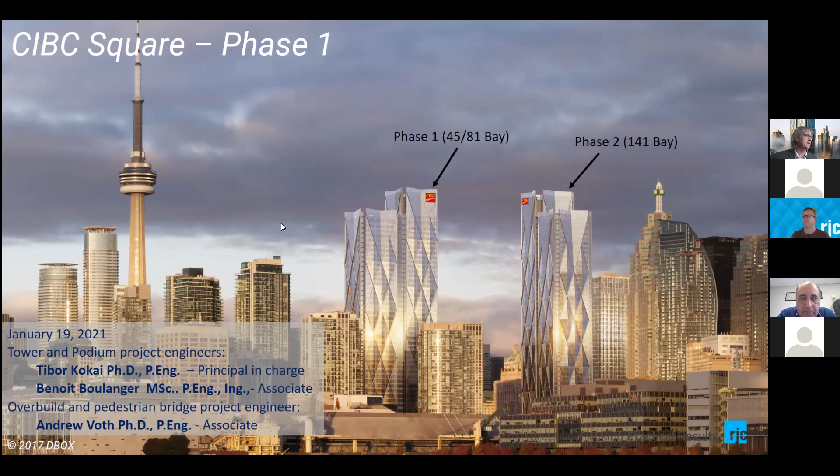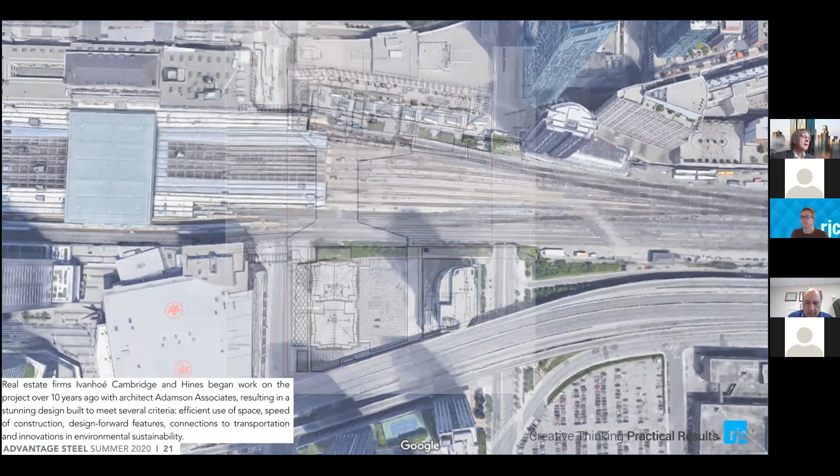The complexities are enormous because there's a TTC LRT tunnel from Queens Quay. The streetcar goes underground, turns up, and turns here. The Gardiner Expressway with its special foundations is also an issue. The current GO bus station at the top of the screen is right now operating from the Phase 1 podium.

That's an interesting proposition, because the North Tower, Phase 2, the brown part, has its core fitting at the current GO bus station, or the previous GO bus station location. But the columns cannot come down because they would be in the rail corridor. That's an incredible complexity we'll talk about. This project is at least 10 years old.

Ivanhoe Cambridge bought the land. Adamson Architects started, Adamson Associates Architects helped them putting the proposal together, and the whole scheme did an incredible job.

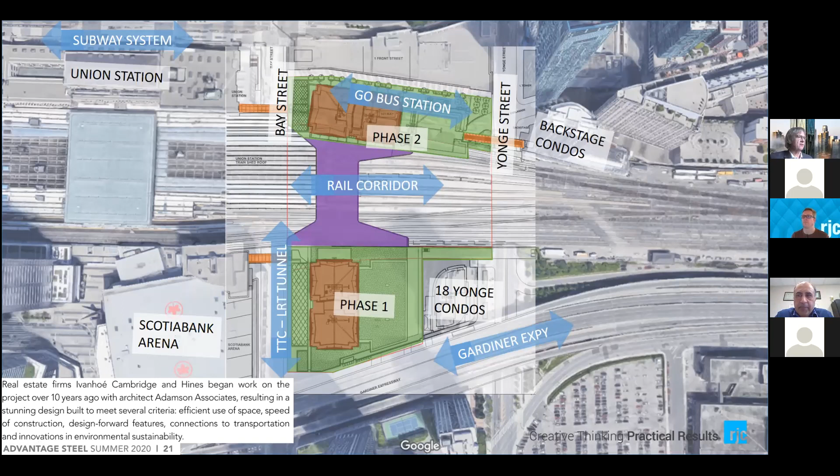And of course, the competition was won by Wilkinson Eyre, who are the design architects.

So the two towers model is here, 2.9 million square feet. CIBC leased 1.75 million. Developers are, as I said, Ivanhoe Cambridge, architects Wilkinson Eyre from London, England, Adamson Architects. Structural is RJC, electrical Mulvey & Banani, mechanical TMP, general contractor EllisDon, structural steel Walters, formwork Structform, rebar Harris.

We'll talk about these more, but it was an incredible team. I have to tell you, for many, many years, we worked together. There were tough times. Everybody behaved in a civilized manner. We are still happy when we see each other. And I tell you, with the complexity at this level, it's a great result.

So let's talk phase one, the tower. The tower is 49 floors, 6 mechanical penthouses, 3 underground parkings, 1.5 million square feet rentable, 54 elevators.

Think about it, 8 levels of podium. The podium houses a real bus station, 2-level bus stations, plant rooms, mechanical rooms, food hall, fitness center, conference center. There's a pedestrian bridge on the project, etc.

And future connection to the LRT, TTC LRT, I showed it to you. And of course, with bridge to the Scotiabank Arena, former ACC.

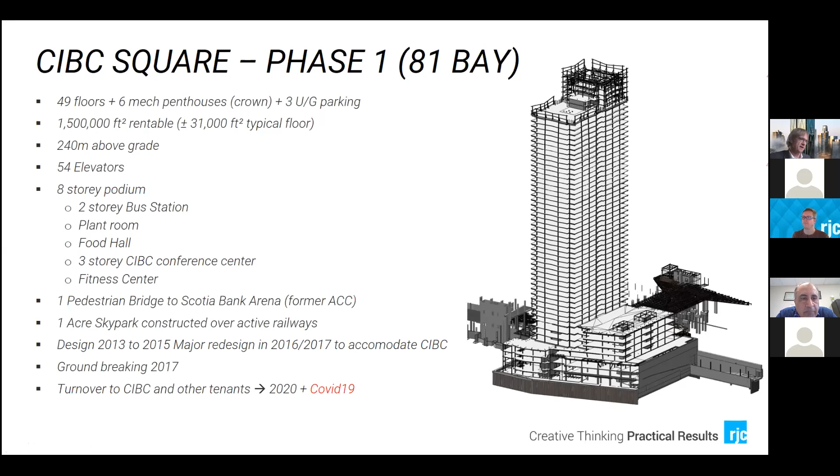Some tonnages and some data about the project: 130,000 cubic meters excavated. I'm watching my clock as well. 12,000 tons of rebar, 2.2 million square feet of formwork, 86,000 cubic meters of poured concrete, 15,360 tons of structural steel.

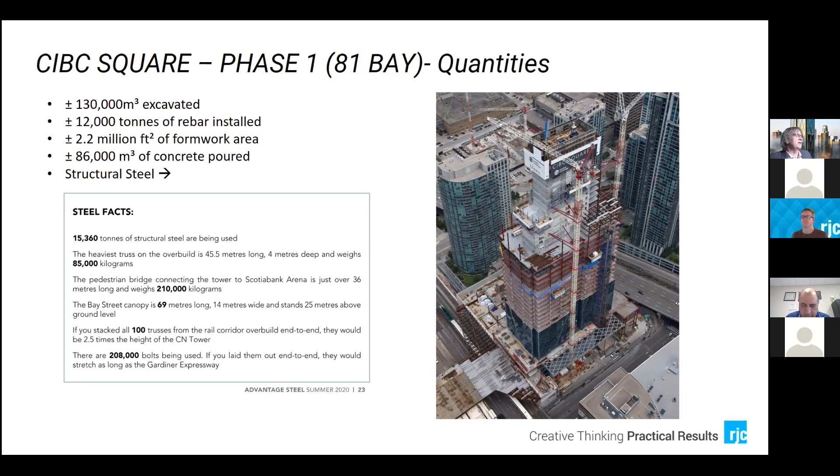Think about it, heaviest truss is 45 meters long, etc. I think that we'll talk, I'll not read everything here, but some canopy is 69 meters long, and Andrew will talk more about the structural steel when he does the overbuild, the podium.

Walters published a little paper about this project in Advantage Steel and talked about and quoted John Frank, the owner's representative. He works for Hines, and he thinks that this is the most technologically advanced project for Hines in the last 35 years, and probably this is certainly the most complex in Canada and maybe in North America.

And he also commented, a senior VP, John Frank, a very great personality, a great person by the way, by training an architect. He said that structural steel was the only choice, and it was faster building in structural steel than concrete. We'll talk about that later. And of course, the rail corridor, another great statement by John that it had to be structural steel. And I guess Andrew will talk about it much more.

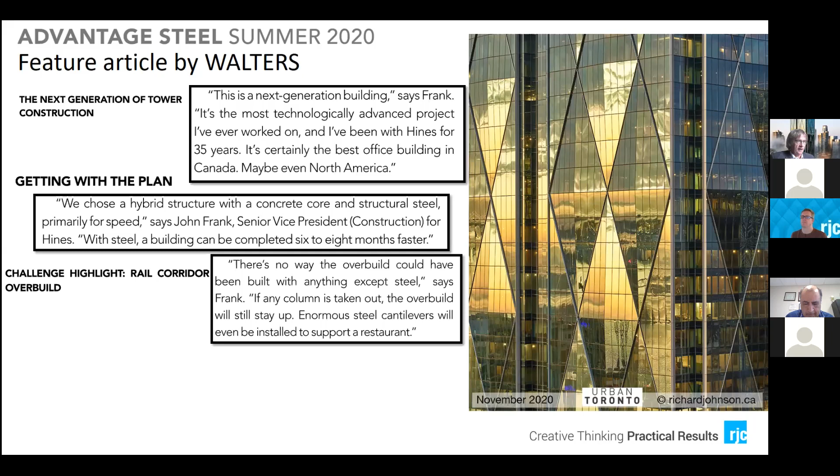So let's talk about the podium. Now we go, that was the introduction about the project. Let's talk about the podium, how complex the podium is.

And you see on the right where my cursor is, that entrance for the bus terminal works now. You can use this. So the podium has Metrolinx's new Union Station bus terminal in there. So Metrolinx did pay part of it for what is there. So yes, it was Hines, Ivanhoe Cambridge, but Metrolinx was a partner. So there was a great cooperation with Metrolinx in making this happen.

And I maybe missed them, but they were really another great group of engineers there. There is a mechanical plant, food hall, and three floors of office building. So look at the complexity.

So the tower is on the left side, and to the very bottom left on the screen, you see the overbuild where the trains are. I mean, magnifying this, you see that at the ground floor level, there is a bus. Now, that's the first level of bus terminal.

But now the green is a 24-meter span post-tensioned slab, flat plate. It couldn't have been thicker because otherwise this elevation would get too high and it couldn't match the overbuild over the rail land. So there were architectural and geometrical constraints on why we selected what we did.

It's not just the engineer saying, oh, I'll do a PT. This is concrete built below grade, then a PT, then structural steel, and everything from here is structural steel. So this large span PT for the buses, full story truss for buses, and between the trusses and mechanical systems, and above offices - very complex. And organizing all this, designing, building on time, super complex.

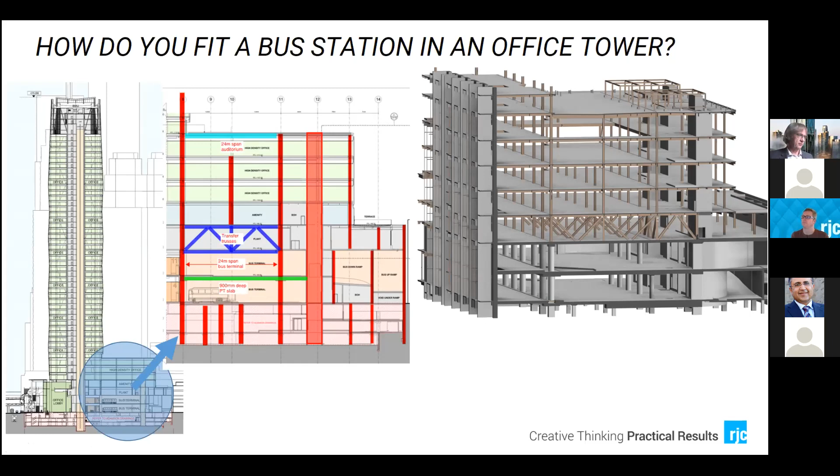You will see the details now. So this is the podium, Revit. You're building the columns, then you are building the ramps up and down.

So here you see it's like a DNA, like a scissors there, by one coming up and going down. And this is the post-tensioned slab. Now we are starting with the trusses. But think about it, when you build these trusses and you deck it, you can't put in the big mechanical units. So the big mechanical units were put in before the floor was poured. So the top chords of these trusses were unsupported. Is that right? So you had to temporarily shore them so they don't buckle and you can still install the mechanical units. There's lots of thought going into this in how you design it.

And what is interesting, and very important for you young engineers, is that sometimes the support conditions of the structural elements during construction are more complex and very different from the final condition. And you have to design for those steps. And that's not as easy because you have to understand what the mechanical engineer is doing and installing the units now and not later, etc. So this is where the teamwork of the consultants is so important. It's not enough to know running ETABS and SAFE. I love those, don't misunderstand. I love 3D finite analysis and whatnot, but you must understand why you do what.

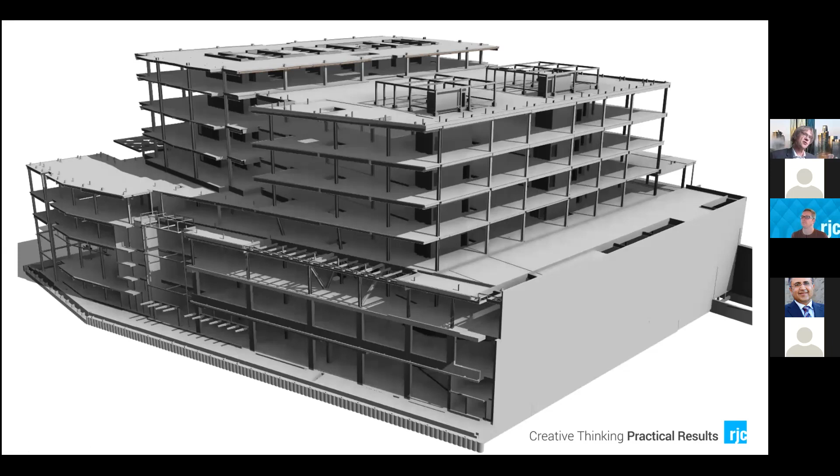Anyway, it was a bit long. Here's the mechanical coordination. These are just the ducts. And so then you build up, up, up. This is now our normal, typical structural steel floors. But as you see now, we leave out the columns and there's the big auditorium here in the top and so on and so forth. So that's the podium. And of course, we didn't even talk about the basement. The basement is 3-level underground reinforced concrete, but the loading dock is there. So all these have to straddle the loading dock. But this is the reality here. This is the real picture as you build it.

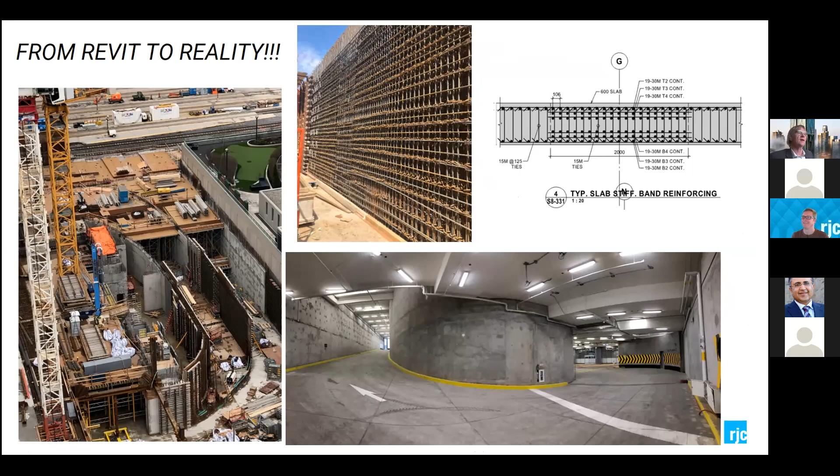And it's beautiful. And what you see here, this wall with this insane amount of shear elements, I cannot tell you why it is there, but it's a special design consideration for this building. And that's all I can say. I think you might understand, but if not, well, sorry, I can't tell more. Some things are confidential.

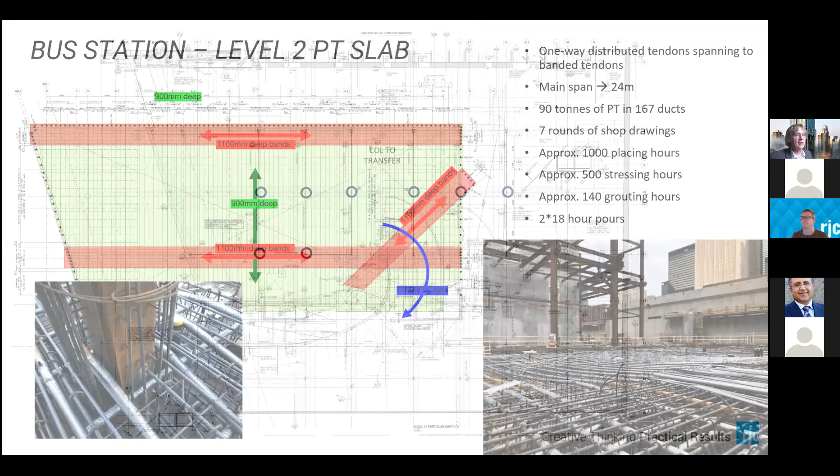So this is the PT, level 2 PT. We have 900 PT slab. We have a band of 1100. And this is 90 tons of PT. This is 7 rounds of shop drawings coordination. It was two pours, each 18 hours. And look at the PT, the ducts. You see the two-directional post-tensioning ducts, and around the steel columns, which were sitting on concrete below. So it's picked up by a concrete column below. These are the columns above, columns to transfer out, and those are the orange ones which go down. And you will see that the steel trusses were located to pick up these columns from above.

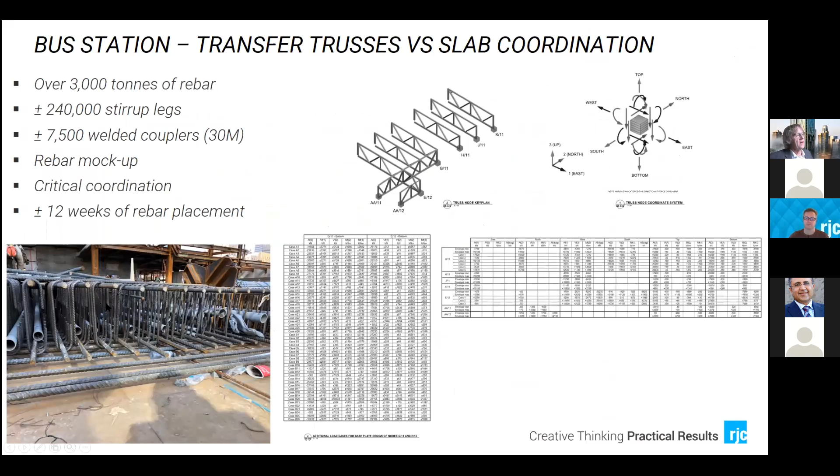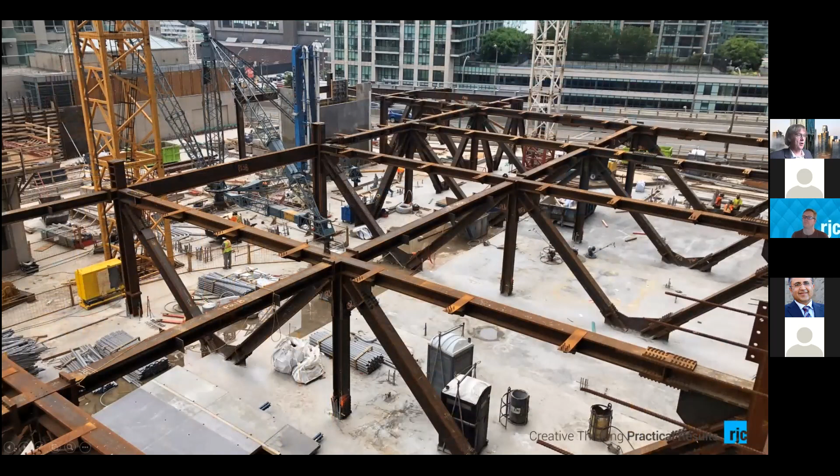And this is the 3D trusses you saw. And what you see at the bottom left is the slab in line with the bottom chord, and we had to have continuity. So this is how it looks. So this is the bottom chord of the truss, but the slab is a touch thicker than these bottom chords. And we had to have bar continuity. So these are half-length couplers welded to the nodes, and we had the continuity ensured that way. And this is then a concrete pour. And the mechanical units here are not in yet, but so that's the podium.

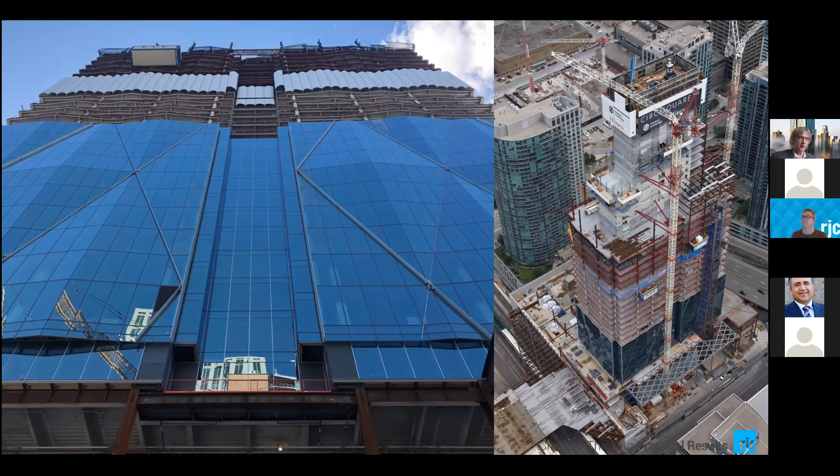So let's talk about the tower. The tower is another complex piece of architecture. It's a beautiful architecture. And I will tell you again, because it's true. If it wasn't true, I wouldn't mention it. So Wilkinson Eyre and Adamson were a charm to work with, and the whole team was great. And the owners were making decisions on time, which is super important. You can have a great crew of architects. If the owner doesn't make the decisions on time, everything is slipping. But there was a great schedule worked out by the client and the architects, and we adhered to that schedule. And there were bi-weekly all-day meetings, and the architects flew in from London, England. It was that serious. Sometimes they called from London, but it's not the same, as you know. So office, 49 stories, 240 meters tall.

Again, don't forget, this is exposed to wind because in the rail corridor, the wind is coming from the west. So the shielding of the building is not there. A building at King and University, for example, is much more shielded than here. So of course, it was wind tunnel tested.

So this picture on the left of your screen is the original design. Not much different, but look, this is a real diagrid. The columns were diagonal coming down. And this is where the rail goes, and this doesn't go down because this is where track number 1 is in Toronto. And I think Union Station has about 50 million people a year coming. You can't stop it. Then there was a shopping mall over the overbuild, which never happened. But this is the overbuild, over the track. And this is phase 1 we have.

But what happened is this, and it's very much the same. So congrats to the architects and the owner that they kept it. The difference is we don't have a diagrid, and that has a very short story. And the short story is very simple. We designed the diagrid. It's way too expensive. The Toronto market per square foot of office is not New York, it's not London, England, and it's not Tokyo. So if you only rent for so much per square foot, you can only build for so much per square foot. So that's your market. When in Rome, do as the Romans do, and when in Toronto, you can only build what you can sell in Toronto. So it's very important that we understand these parameters.

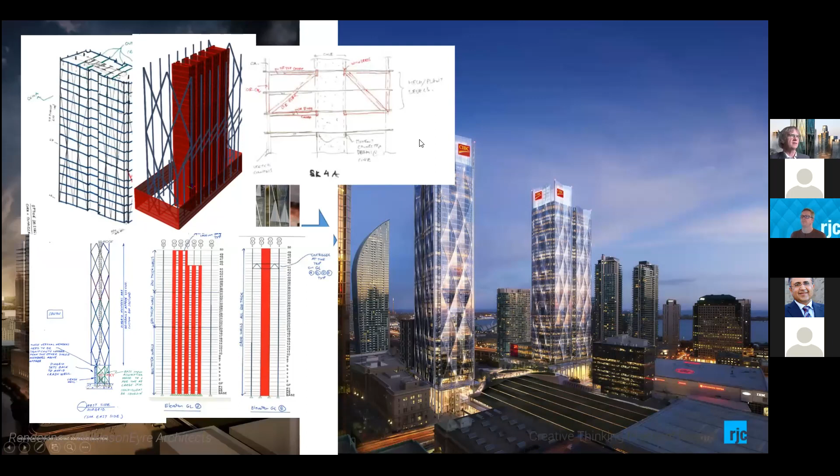This is some model, but we have done many ETABS runs on many different schemes with outrigger schemes. Look at the outriggers at the top. Yeah, it's hand sketches, but I want to show you that we start there. We start to imagine these structures in our mind, then we build the ETABS model, then we see if it works deflection-wise, acceleration-wise, and strength-wise. Never miss any of these. One doesn't go alone. So this is the outrigger scheme.

This is now the current scheme of phase 2, columns coming down, tilting in to avoid getting into the rail corridor. And various schemes we have done: concrete typical floor, structural steel typical floor, concrete, many beams with concrete. So all kinds of options, and we costed it out to see what's the most efficient and cost efficient.

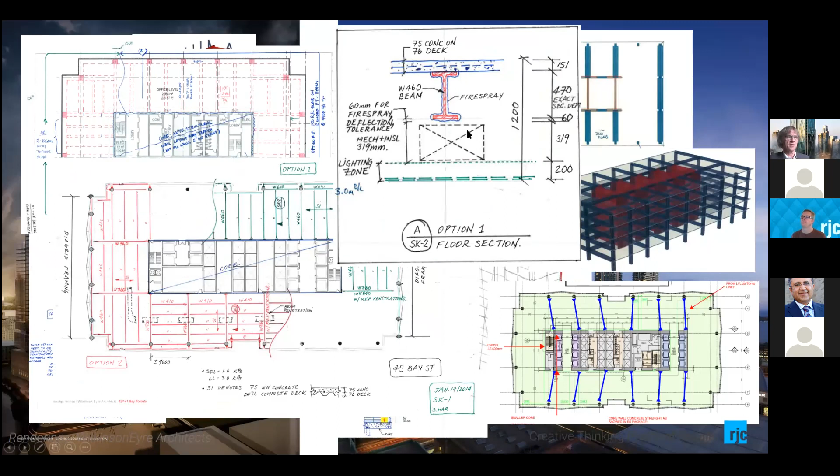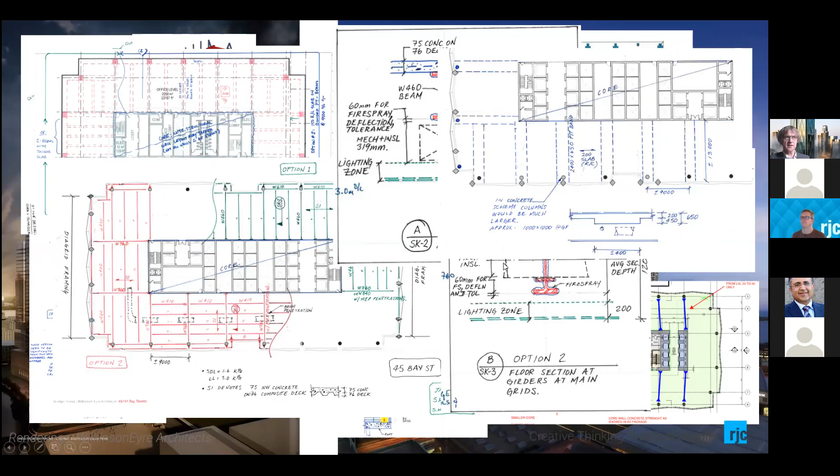And this is a classic. Day 1, you want to know what's your slab, your deck on the steel beams, mechanical goes under it, electrical light fixtures are here. What is the sandwich? Can we build this height of tower? And the same with the girders: when the ducts go through the girders, does this work? Day one, you have to. Here's a post-tension scheme. Post-tension flat bands, ducts below. So what is less costly? What is faster to build?

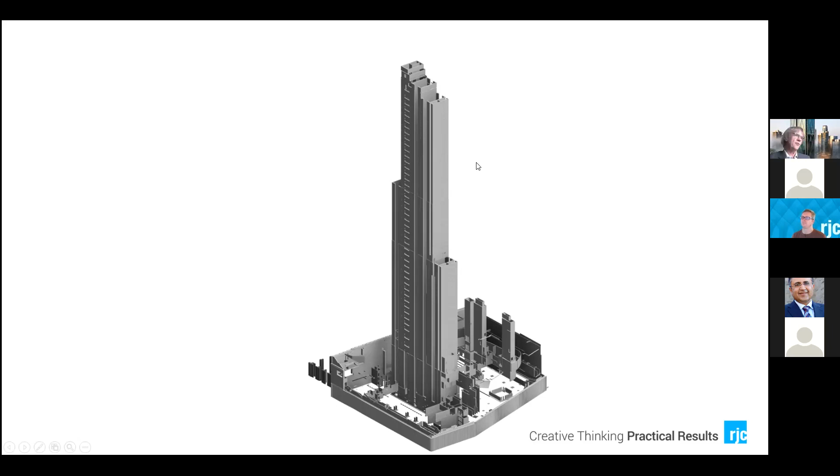So now let's look at the tower. We undressed the tower. We took the cladding off. We take the deck off, so we have the beams. Now we took the columns and the beams off. This is the core. This is the lateral load resisting system. The core is in the middle. The core drops off on the right and the south first, then drops off on the left. And as we go up, we have larger floor plates to lease, to rent. Obviously, this is super important. So this is how we built this.

And as you see the diamond shape, this is the core, the elevator cores, and these are the columns, beams, large cantilevers in both directions, moment connections in both directions, not that simple. And you see the edge beam is straight, but you see a diamond-shaped building. Every floor looked like this, whether the core dropped off or not. And we decorated the edge of every floor differently to give you that diamond or flat pyramid, because this is a very flat pyramid, not with a square base, but with a rhombus. So it's very simple, as you see.

And now we add the edge, and these edges are different at every floor to create the module. And then this is how the typical floor was built. And so it went this fast.

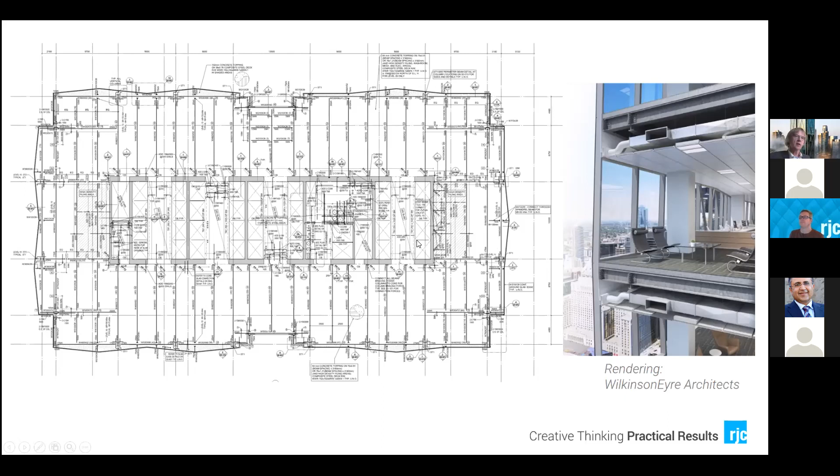So now this is the real set of documents. This is a real drawing for permit and for construction. And as you see, the straight edge beam and the edge undulates differently, depending where you are, all around. And so you see the core, 12 meters to the perimeter. This is a very classic North American style, Class A office space. 11 to 13 meters from core to the perimeter, no columns, it's Class A. Any columns in between is Class B.

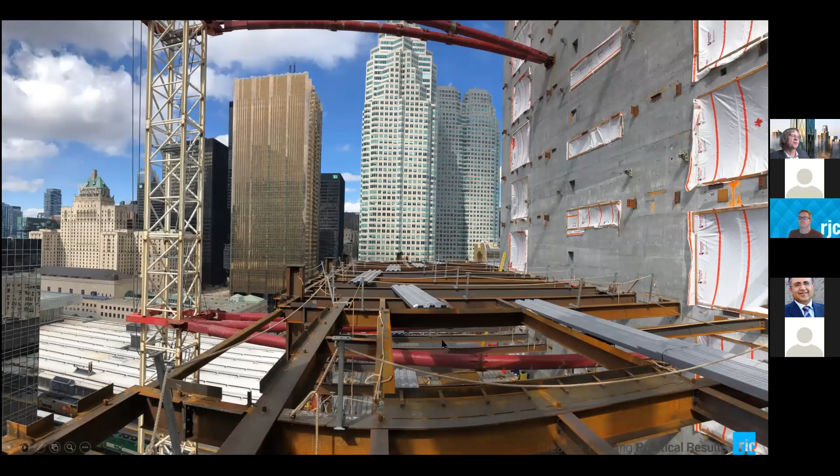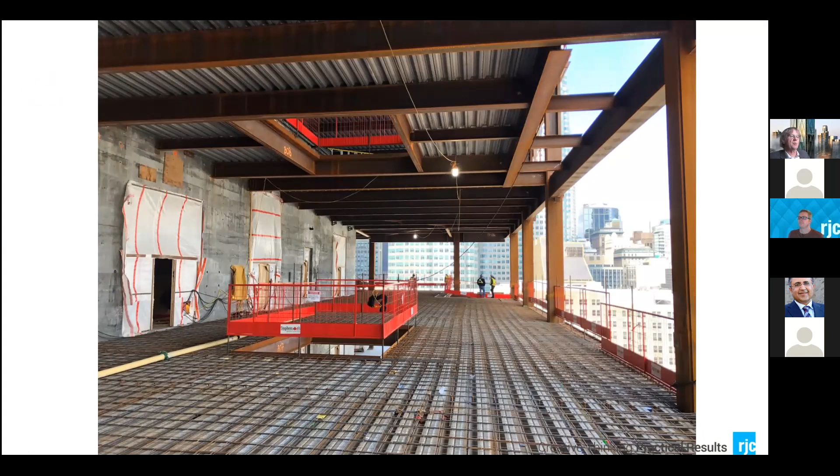And so of course you see the mechanical under the 460 beams, etc. So this is how it looks in reality. Fantastic location, fantastic site. You see the red props to the core to keep the crane stable. Now I'll flip you some of these beautiful pictures, and in some of these, the deck is prepared for concreting, mesh in there. Again, you see the huge props to support a crane.

Of course, every construction company wants to save and say, can we just prop this to the beam at the edge and we save all this length? Well, these connection forces are much weaker than the force the crane is impacting. So no, but every job we have to go through this question.

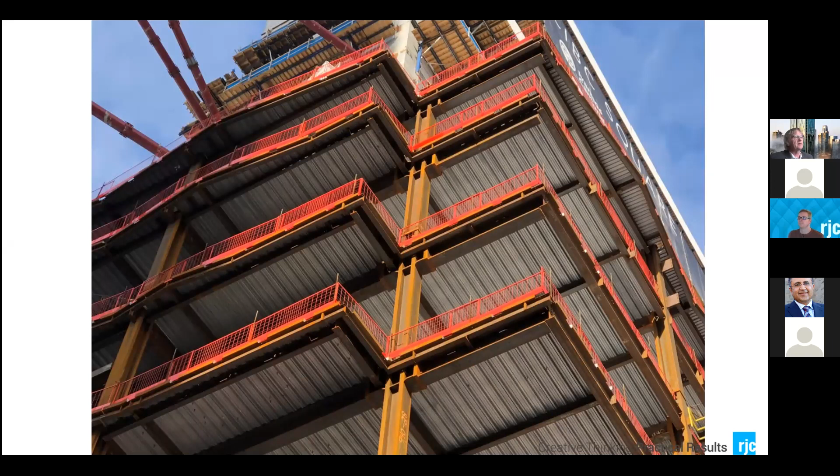And so we are at 27. So this is how it was fire rating. This is the big cantilevers you saw. And these decks from below are not fire rated yet, nor is the structural steel. So the columns, of course, should be small, but look at this. Jumbo sections. Solid 900 by 900 steel columns.

We'll show you why. This is about 40,000 kilonewtons supported by this column, if I am right. 24-meter unsupported length in the lobby. Well, yeah, I could have made it bigger, but the architect didn't want this to be bigger. So the Euler buckling formula is very simple, right? The differential equation is also beautiful. But we couldn't get the EI, the inertia. So we needed the area. And some are composite, some are heavy jumbos in concrete, circular. It really was complex. Some columns are skewed. So composite columns, as I said, it was 760 solid steel and not 900 by 900.

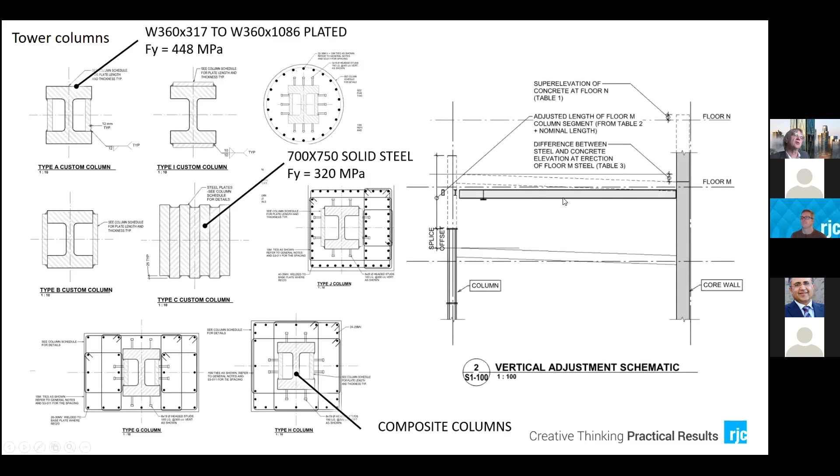Now, I don't want to spend too much time on this, but this is very important. You see this diagram here on the right, and this shows that the perimeter steel columns elastically shorten a certain way. The right side of this picture, I don't know if this is in your way, I'll move it forward, the right side of this floor is the core, the face of the core. Now, the face of the core shrinks and creeps. Concrete shrinkage and creep, let's say, occurs in 5 years. Elastic shortening of the steel, well, it's whenever the load is there.

Now, the datum of this floor, look at this where the cursor is horizontal, I have to super elevate, build higher the core so it sinks to the datum elevation in 5 years. I have to over elevate, super elevate the steel columns. So when we build the self weight, we squeeze it back to horizontal. So we tell the client, in 5 years, you will have a horizontal floor.

It's like a Swiss watch, but you know that ACI 209 tells you that the shrinkage and creep calculations are plus minus 100% accurate. So don't ever forget to think above 25 floors that there are super elevations going on, because sometimes some people are not doing it to 40 floors, but above 35, 40, you definitely have to think about how much you super elevate to make sure you balance the floor. A very complex topic, but it's enough for you to understand that we deal with lots of complexities on tall buildings.

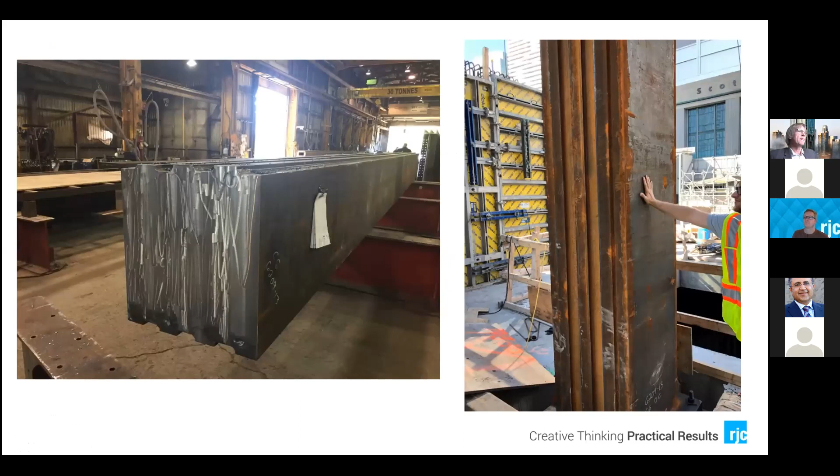This is that column that is in the lobby. I guess it's Tom Kasparek holding onto it. This is the shop from the Cherry Beach. It was shipped, and so we went to the shop and looked at it; this is on the site. But this is the 24-meter column. This is the lobby. And this is tied in at level, I think 5 or something like that. And this is down 20, and this was spliced in the middle.

What is the spliced force of this column in the middle? It's not easy because it's not in the code. What is common practice? What are your loads? Does it want to buckle? What is the buckling load? These things are not in the S16 code, and not necessarily covered in the curriculum at university. These are things you pick up as you become a senior engineer.

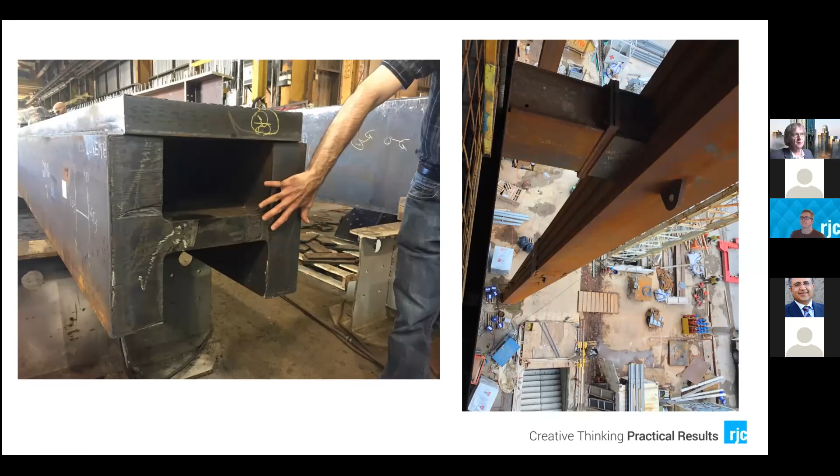This is a few beams. This is some base plates. You can take one home.

So we'll show you foundation systems. Let me minimize this. So for the foundation system, we were on WSP as the geotechnical engineer. I have 7 more minutes and I'm at slide 30, so I should speed up. WSP geotechnical, TerraProbe shoring, and GFL shoring.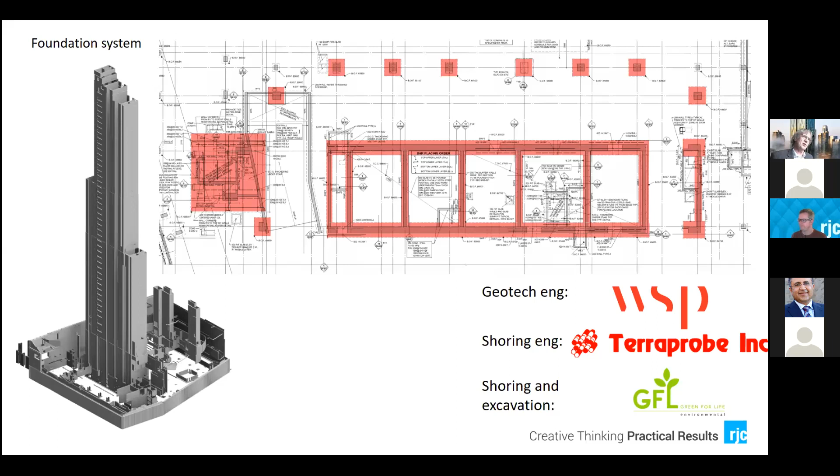We're on very competent rock, about 8 MPa capacity with a safety factor of about 2.2. It's 16 MPa concrete, and they're sitting on that 16 MPa concrete. We have spread footings and linear footings under the core. We didn't even make a small mat or small raft under the core - there was no reason to.

And there's no uplift. Toronto has fantastic conditions in this area, up at Yonge and Bloor the rock is 40 meters down. So this is great here. Let's go quickly.

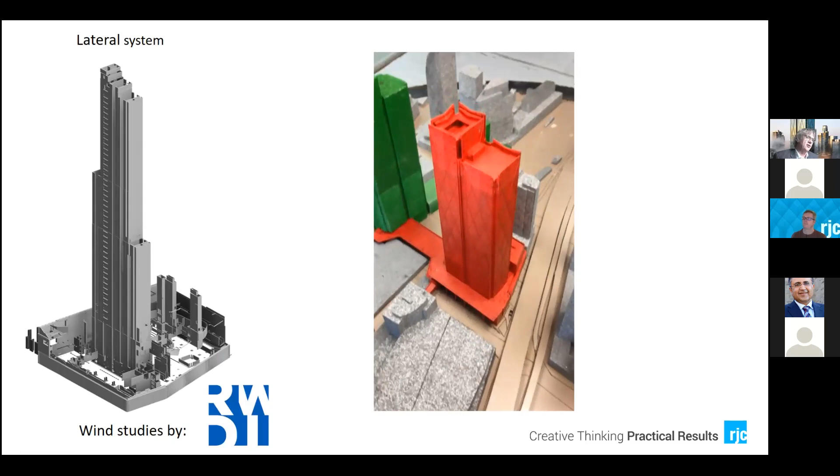Spread footings, columns, and of course wind tunnel testing. Here's the model, 10 million measuring points by RWDI - we've been working with them for the last 2.5 decades. It's an absolute fantastic company, and they are really the preeminent in the world. We're just showing off some local video about what they were doing here, what the model looks like.

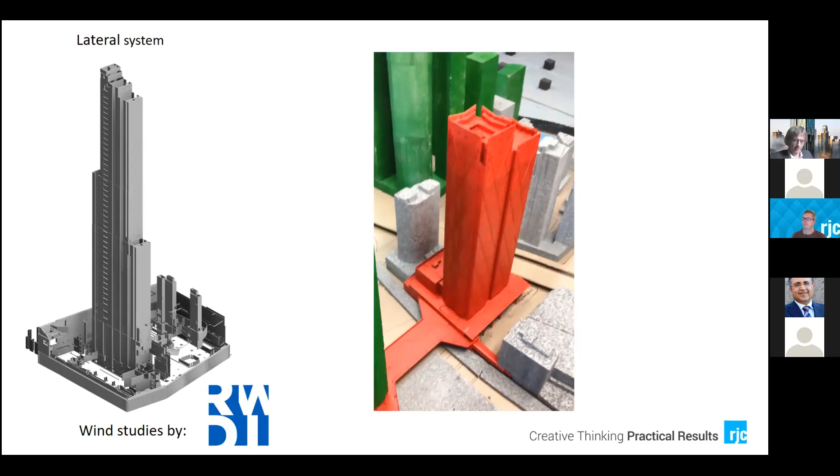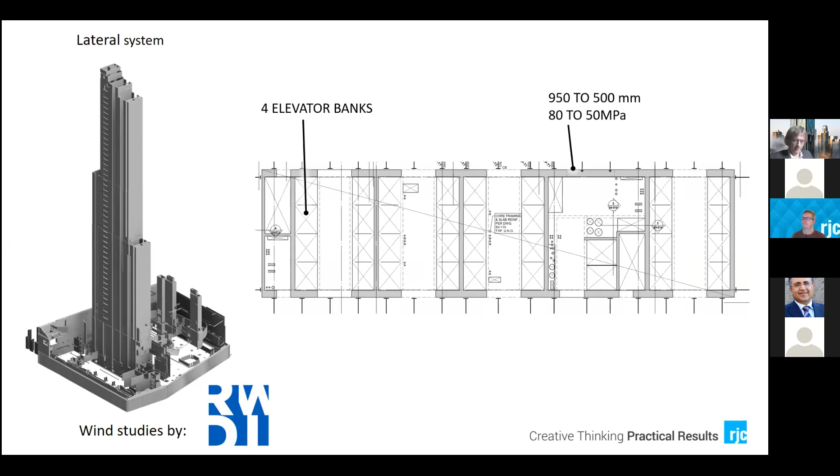That's the other tower, the future tower. All right, so we talked about the lateral system, how many elevator banks, how many elevators. Walls are 950 to 500 thickness - 500 at the top, 950 at the bottom - 80 to 50 MPa concrete strength, with core setbacks.

And what do setbacks do? Look at this - we'll quickly go through it, but I really want you to see this. If we stop the core here but continue, what happens is you're still compressing this side but not compressing that one. That creates incredible shear in these coupling beams.

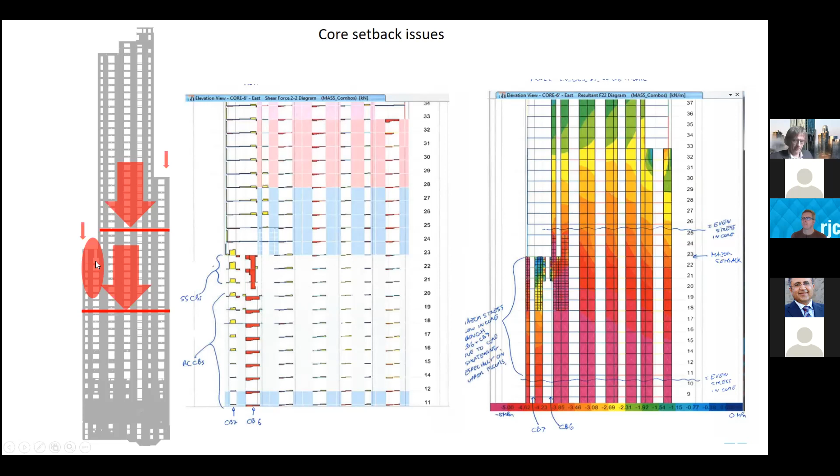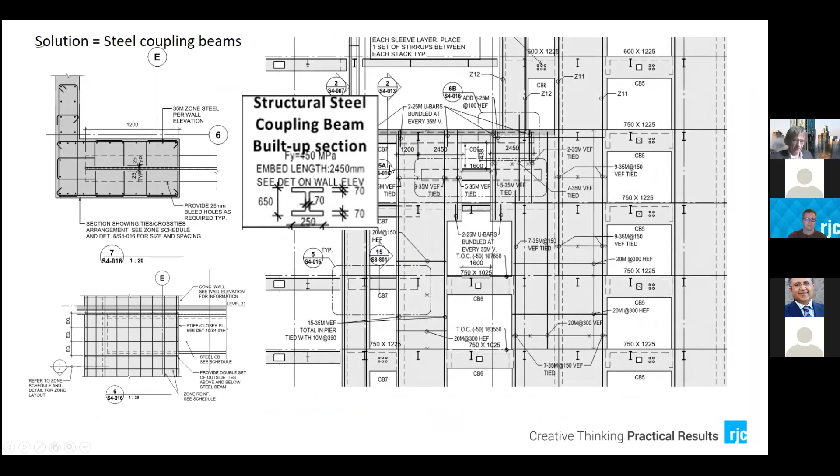These coupling beams, we couldn't make work. We had to make them from structural steel, because as we continued building this, this side didn't get enough weight - it's an elastic medium. So basically we had to go with structural steel coupling beams just to make that happen. Embedding these structural steel coupling beams in concrete was not an easy feat.

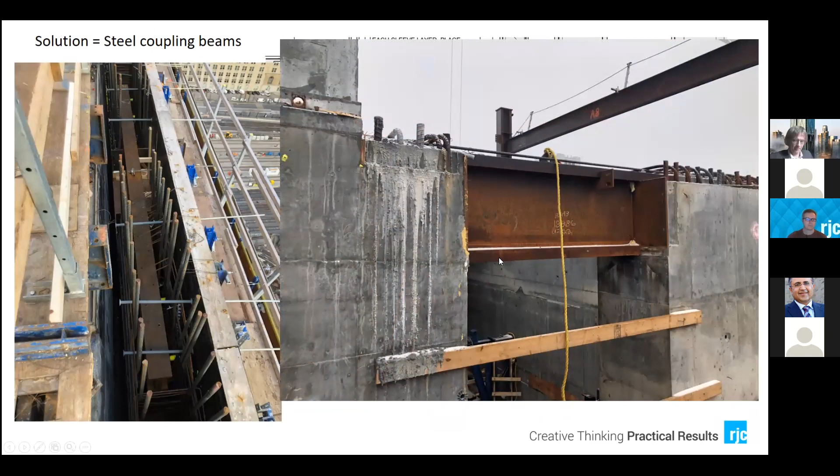This is how it looks, looks pretty. This plate held the concrete in the formwork. Now we had diaphragm actions, of course, because this is the overbuild that has an expansion joint. This is phase 1 with some tilted columns, which we'll get to later.

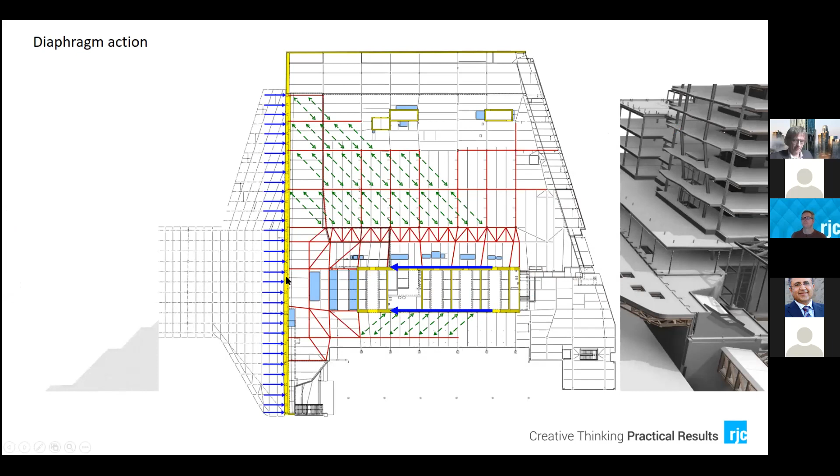And of course, if the core, the yellow, moves east-west or up-down into this 1 meter thick crash wall - and this crash wall had to be there so the trains moving here don't come into the building. Proving the crash wall's stability and strength with special codes is a whole different topic, and hopefully Andrew will talk about it if I give him time.

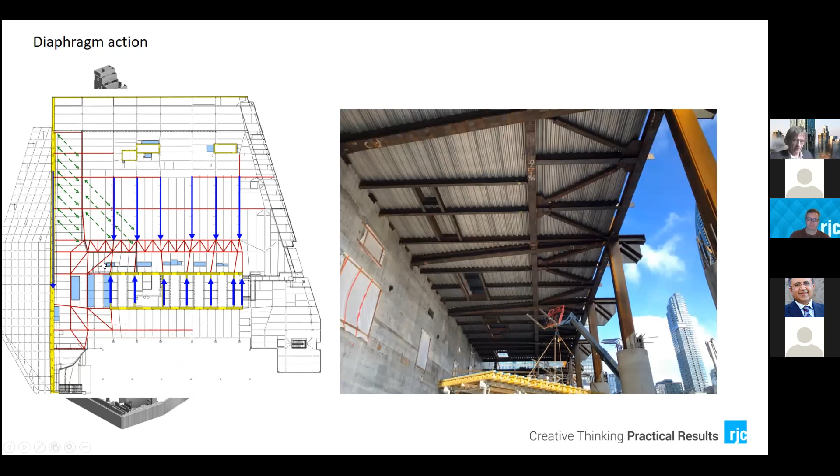I have 4 more minutes, so I'll run through this. The diaphragms prop the core, and we have to deal with diaphragm stresses - we built diaphragm trusses, horizontal trusses, to take these loads from the core pushing into the diaphragm onto the crash wall, which was very rigid. The other issue is we have columns that are skewed to avoid ramps and loading docks.

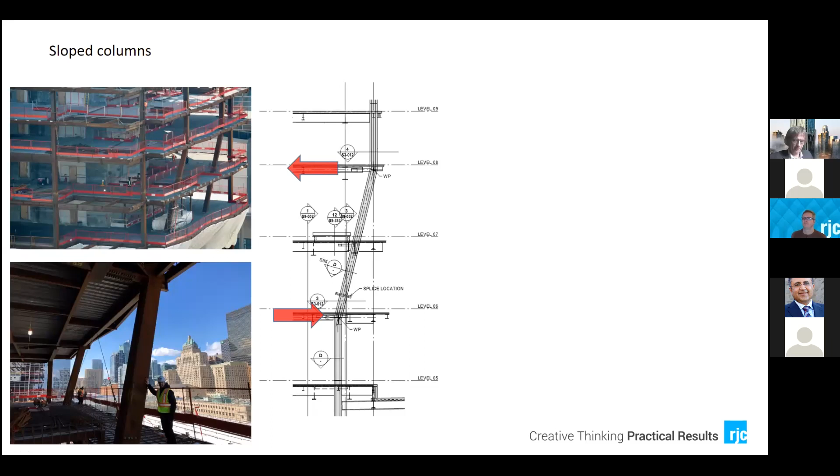So what happens is insane tension and compression. These tensions become shear in the core that exceeds the maximum shear from wind and earthquake. Do not ever forget designing for skewed column loads, because they are insane. They are large - take 30,000 kilonewtons and times 0.3, tangent 20 or something, and you will see the load. You have to bring that load into the core.

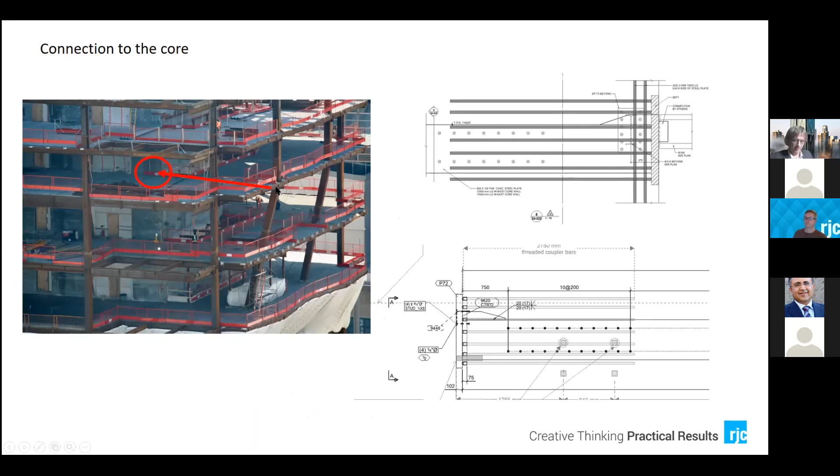This is the beam embedded into the core, with ties around it, etc. We designed a detail with column from above, column below, and a strong plate, but Walters came up with a better detail - having 3 very thick plates and just bolting the flanges to it. We had our own details and covered the cost, but sometimes, let's face it, Walters is an absolutely world-class company. They would say, hey, I want to do this differently. Sure, no problem, both work.

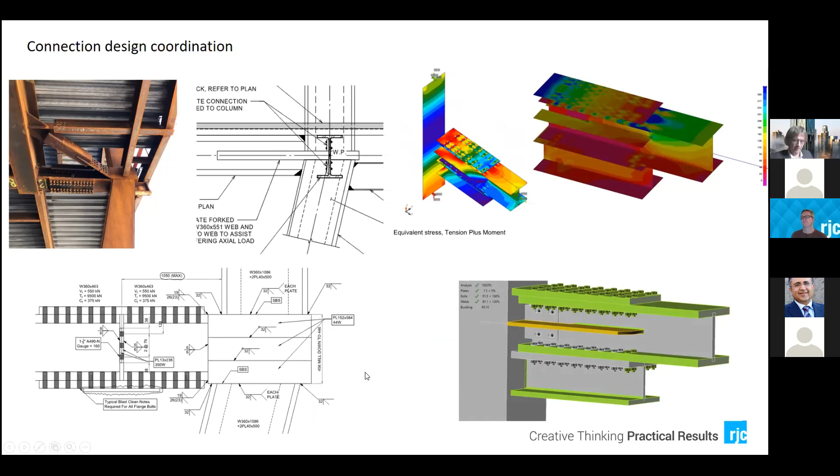Also connections to the core, when you assume something is pinned - is this pinned to you? It will not. So you better think about your boundary conditions all the time. You can't just say it's pinned when it isn't. It won't behave as a pin.

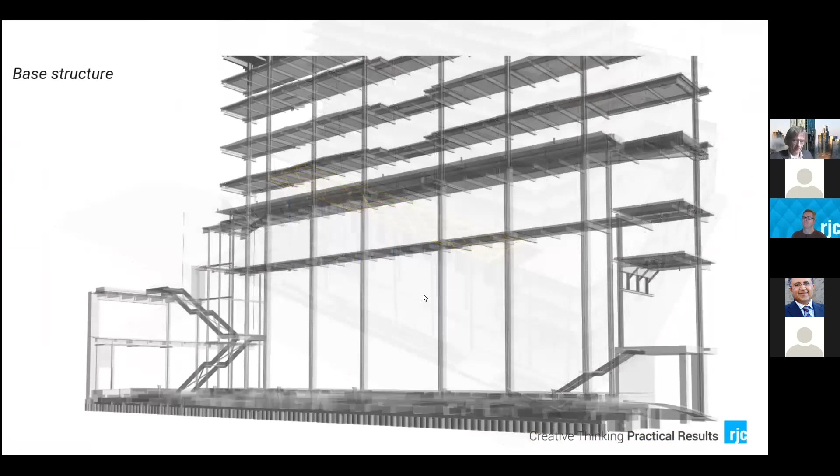This is the system, and there's this incredible long stair going up to the overbuild across to the north. These are the columns, the beams going back, canopy girders, canopy columns, and of course this is the cable wall header beam I talked about, and this is holding the glass.

Hello, Tibor, we cannot hear you. Tibor, can you hear us? Seem to have lost him. I'm not sure. Unfortunately, he was controlling the presentation. Andrew, yes, let me see if I can grab him, or pull up the presentation myself.

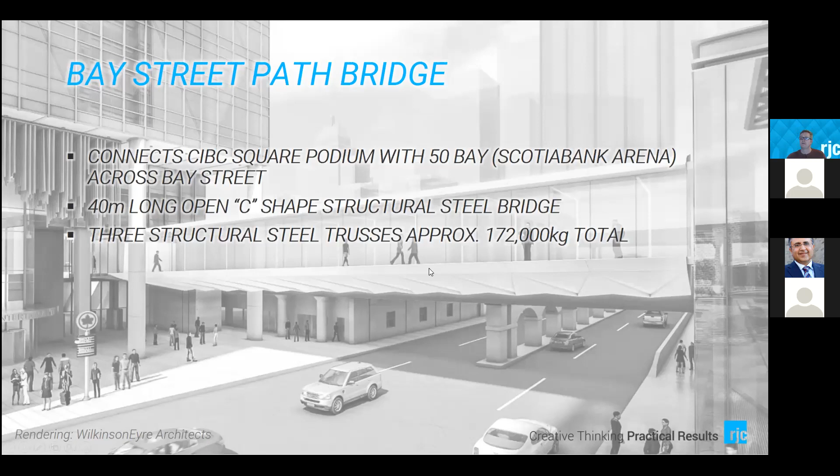So architecturally, the reason why it was an open C shape is because they wanted an unobstructed view down Bay Street, mostly to see their own building, CIBC Square, and the facade, because it runs along this portion. You can see the CIBC Square connection, but also down to the lake and beyond. So that was the goal.

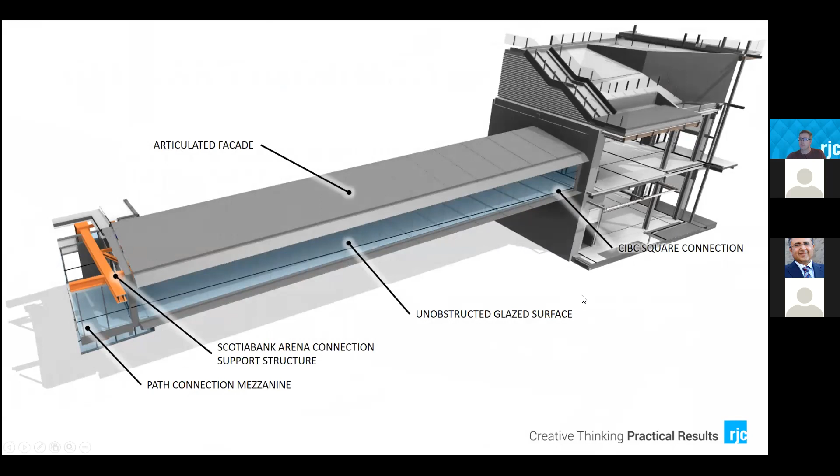There's a few challenges here beyond the open C shape, but we're connecting to an existing structural system at Scotiabank Arena, so that caused some challenges in doing so. So if we break down the structure a bit, you can kind of see what's going on inside.

We start with a series of open C moment frames, and the pedestrians walk between those frames down the bridge. This is the system. They are tapered sections, about 1 meter deep at their greatest, and taper down almost to nothing, about 200 millimeters at the ends. So you really get this airfoil kind of effect for the structure, and it mirrors the diagonal diamond pattern within the facade of the building.

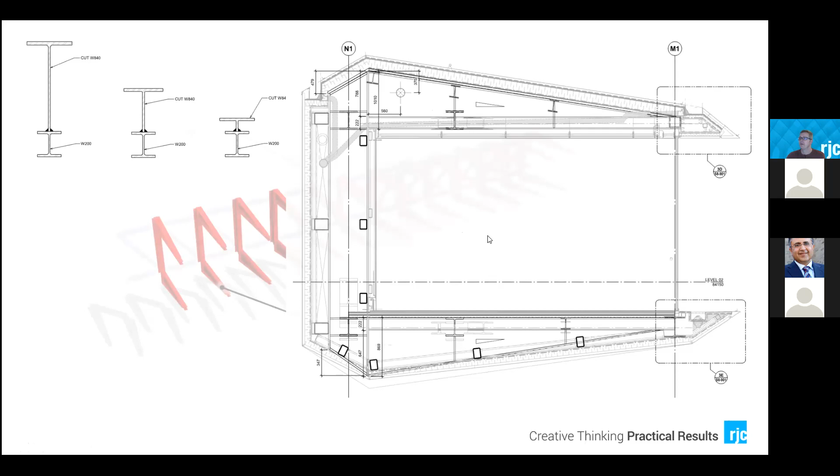You can see some of the mechanical systems and services in the back there. So you put all those C's together and create a back spine truss, and also a bottom and top truss, and those provide both the lateral resisting system for the truss, but also resist the torsion. So they're doing the work, having this open C shape resisted on all 3 sides, and just from a gravity perspective, that load gets transferred into the systems at the end.

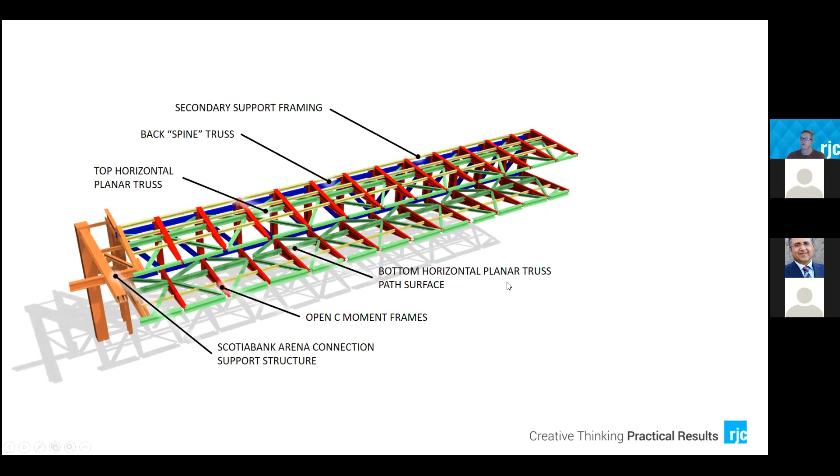First, at the Scotiabank Arena side, we had to do some significant steel work there to reinforce existing columns, which I'll go over in a little bit. And at the CIBC Square side, we were lucky enough to have a significantly thick concrete element, a 1 meter thick crash wall return. And that's important for the project because of where the forces resolve.

This is some of the models we did. Because the bridge wants to rotate downward at its tip because of this open section, we actually did something quite unique here. Instead of just cambering the bridge as normally we would do to help with the self-weight deflection, we actually cambered it rotationally. So we brought the ends of the bridge high at the tip and had this rotation about the center as we went down the spine.

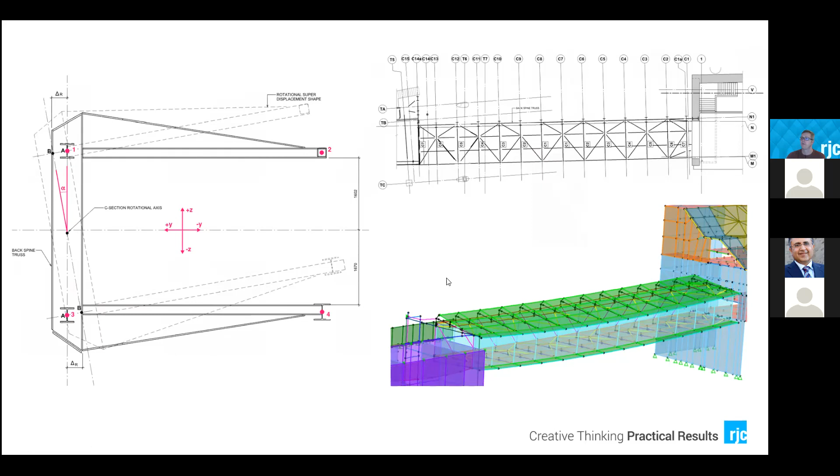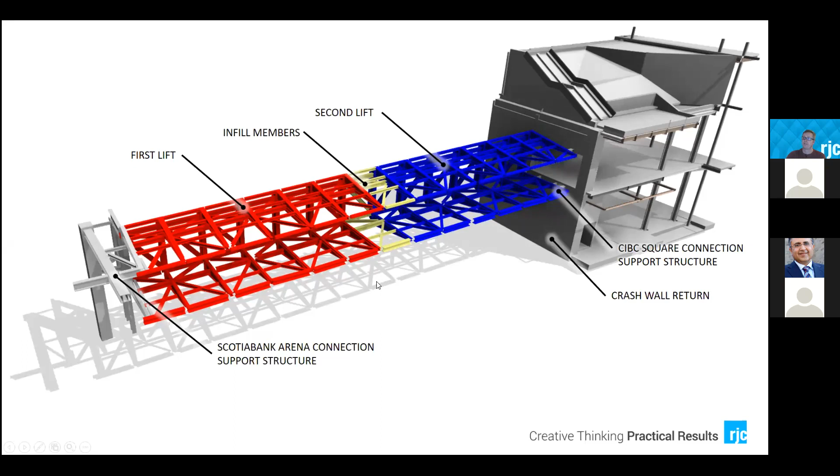You can see those connection points that I was talking about. The way they erected this bridge was also unique, and I'll show some site photos of that in a moment. It was done in 2 lifts. The first lift was connected to the Scotiabank Arena side, and the second lift was connected to the CIBC Square side, and there was an infill piece done in the middle. So they had to temporarily support the first lift while they put in the second lift.

This is some of the photos from the lift. That's the bridge actually traveling backwards along Bay Street, the first piece. You can see for scale the construction crew here and how large this bridge is. It's about 30 to 35 meters long altogether, and it's significantly wide, about 6 meters wide.

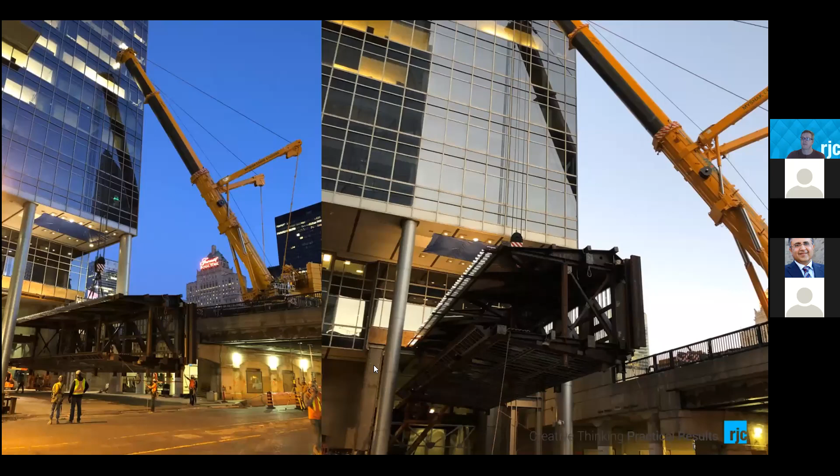Some more pictures of lifting the first piece in place, and that's on a tractor trailer that has fully articulating axles. And one of the largest cranes they could get a handle on, actually sitting on the railway corridor that you see above, lifting this into place. There's one more picture of that - that's the second piece. And then you can see the final support condition.

So a very detailed structural steel bridge to suit a very high level architectural need to see what's beyond. And there you can see the bridge in its final case.

The other aspect that's connecting the project to the city is the overbuild park. The overbuild park is an elevated park that runs over the Union Station rail corridor. The Union Station rail corridor is Canada's biggest and busiest rail corridor, with a significant amount of passengers coming in and out every day. This was, of course, pre-COVID, so there's very few right now. It spans over 16 rail tracks, and it is actually second busiest in North America after New York City's Penn Station.

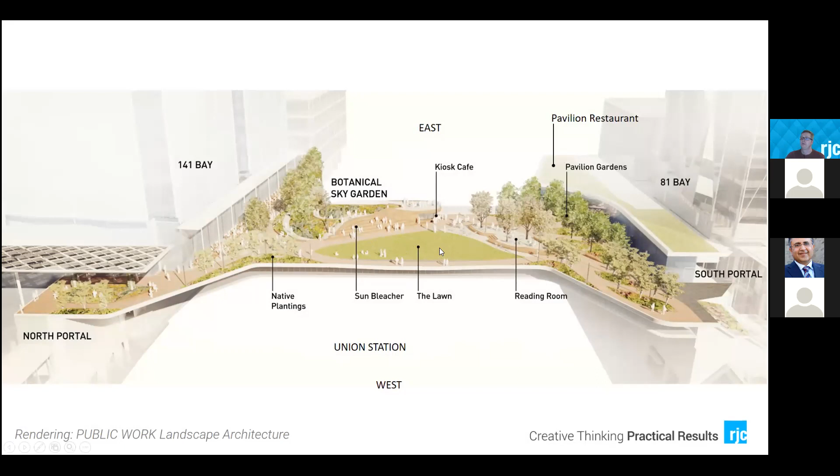The park is beautifully landscaped. There's many elements here for the public to utilize in summer and in winter. It's going to be fully programmable, meaning that there will be events here all year round, and it's connected into both the phase 1 and phase 2 buildings.

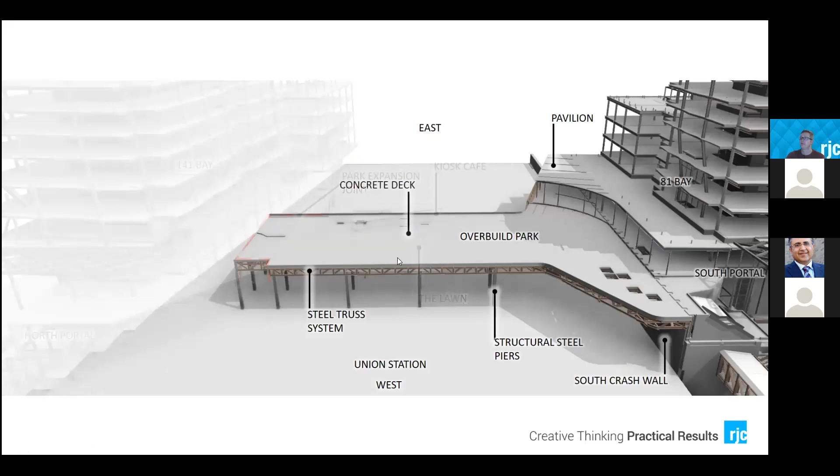So we're connecting the two buildings across the rail corridor and some of the structural elements there. Concrete deck. If we deconstruct it a bit more, you've got our steel truss system below.

Some notes about the steel truss system: there are about 100 trusses on the project, and if you stack them end to end, you'd be about 2.5 times the height of the CN Tower, about 1.4 to 1.5 kilometers of trusses in total. A significant amount of steel here, about 15,000 metric tons.

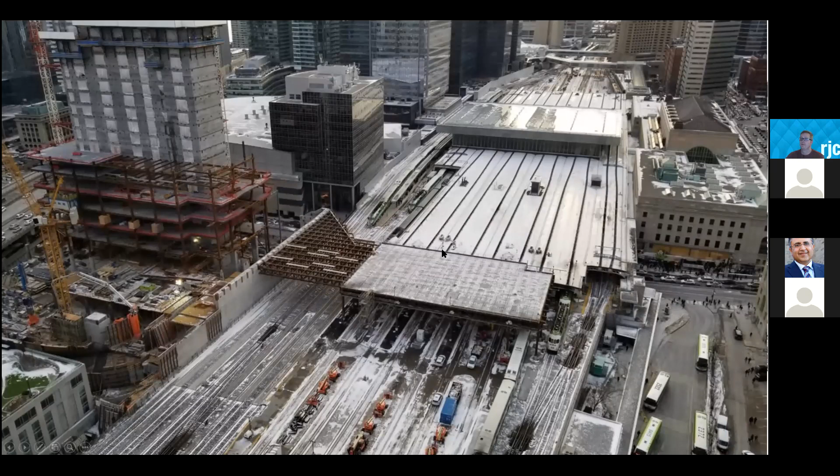This is some pictures of the overbuild during construction. Large, heavy steel trusses, clear spanning in a lot of cases over the tracks. And some views below. Quickly want to talk about the design of this.

The park structure is these large trusses, and they sit on steel columns within the corridor. They are right on top of the platforms that you would use to access the trains. So Metrolinx, who is the rail authority within this corridor, wanted to ensure they had the ability to offload and load passenger trains at any particular point.

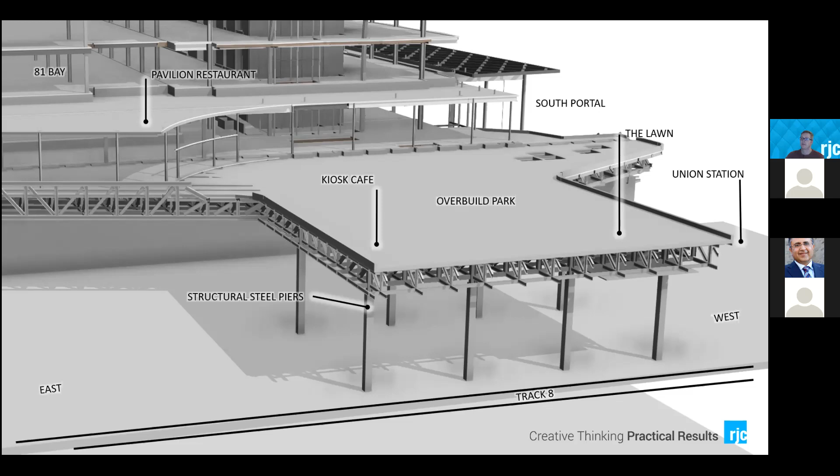But normally they would introduce very heavy elements like crash walls, and we have a crash wall right along the south portion of the rail corridor protecting the actual building. Normally they would introduce these crash walls, but they didn't have the opportunity to do so within the middle of the corridor. So we had to do something a little bit different.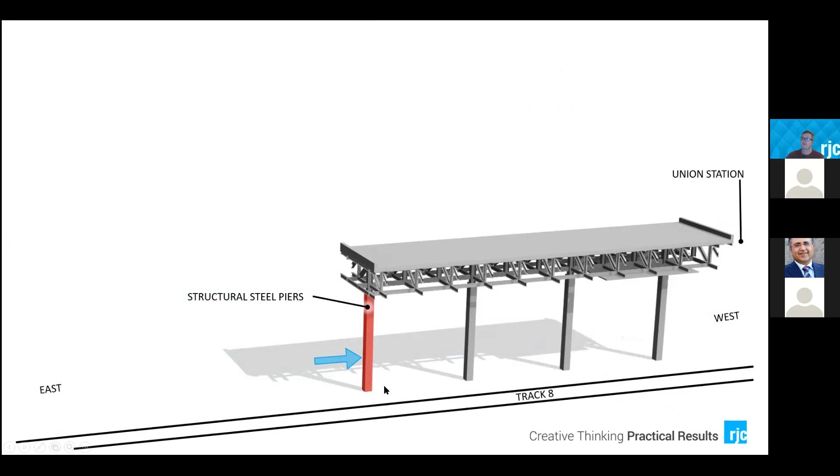The trains primarily coming into this structure are running from the east and going to the west. So if there ever was a derailment in the corridor, there's the potential that one of these columns, any one of these columns, could be hit by an oncoming train. So we designed the structure to actually have a level of redundancy where this first steel column in the front could actually be removed, similar to what we're going to see in this very short video.

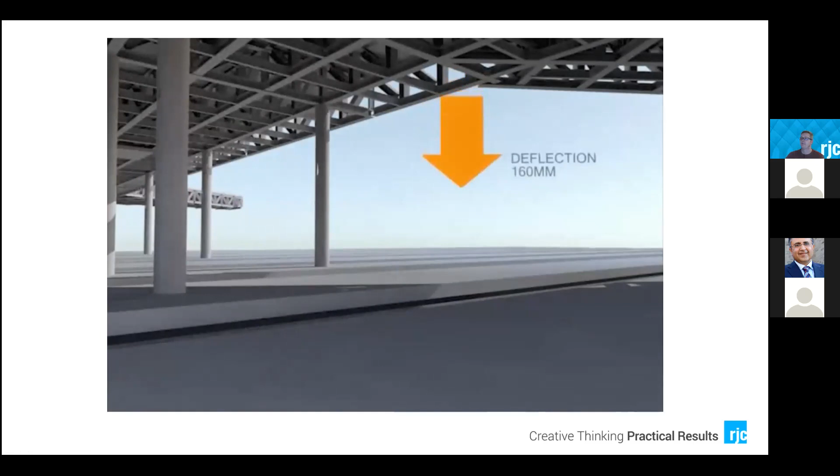We actually made this video for the client just so the client would understand generally what we're talking about. And it seems quite dramatic, lots of flying debris and what have you, but the structure had to, would deflect under that case.

We had to design the structure to allow for train traffic after a derailment and after a catastrophic event, partly not necessarily for train travel again, but for the ability to have the structure to be repaired and to get the damaged train out of the way. So it's sort of a very unique aspect.

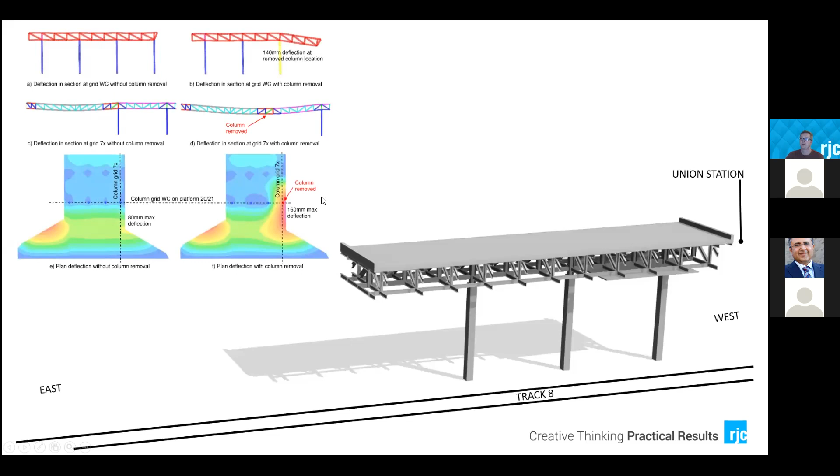And here's some of the engineering we did to look at the column removal and what impact it would have. We were sort of limited by deflection during that state to ensure that rerailing or emergency work could take place. Another big aspect of this is the pavilion structure.

The pavilion structure is supported by this large primary truss. It's a 45-meter long truss, about the size of one of those GO train cars that you saw, so about 2 stories tall. This is the largest truss lift on the project. It connects to the building podium over top of the large crash wall there.

The crash wall is also designed for train impact, but of course it can sustain that. It's meant to design and sustain the impact, not meant to be removed or damaged. So there's a lot of work that's gone into the design of that crash wall.

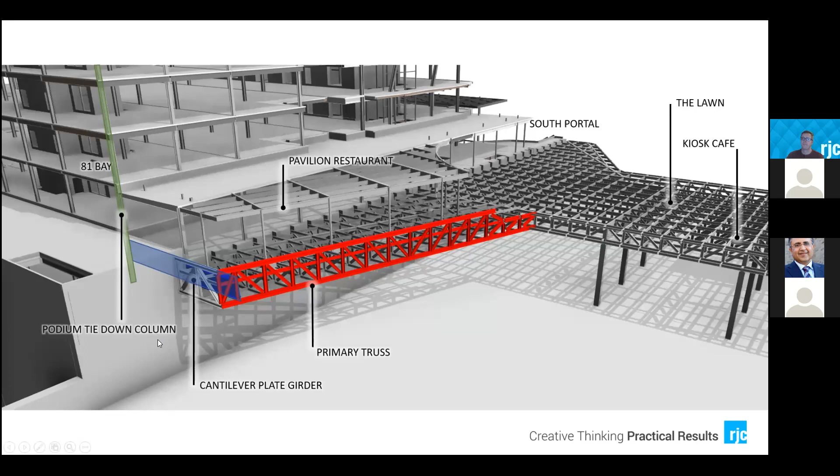But this particular element spans over top of the crash wall and connects into a column that's in the podium, and actually causes that column to go into uplift, which was restrained lower down in the foundations. There's that tie-down column shown in green. So a very interesting system here.

You can see the system on the right-hand side, the big 45-meter long truss, this large beam that spans over top of the crash wall and into that tie-down column. That beam is about...

One of my colleagues.

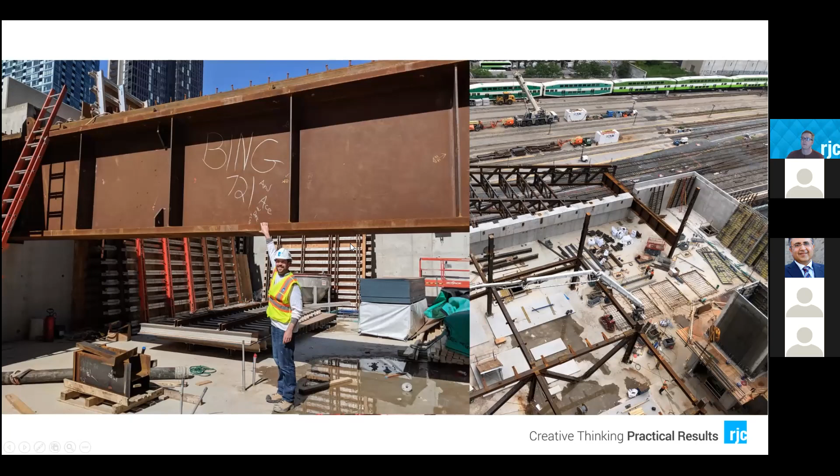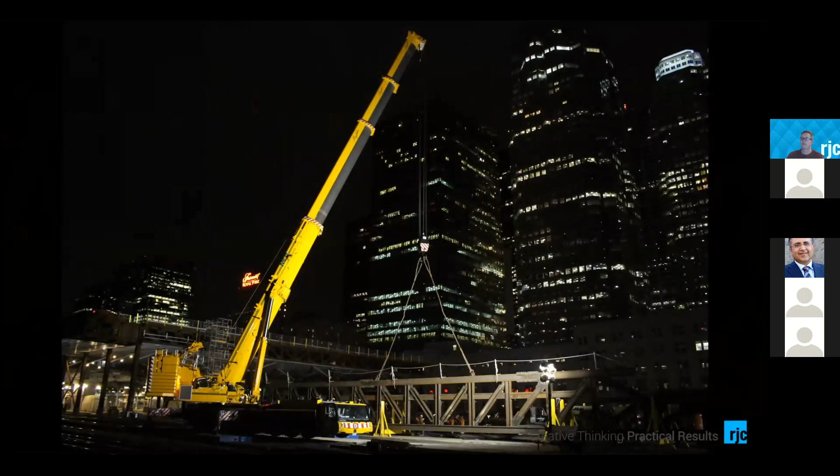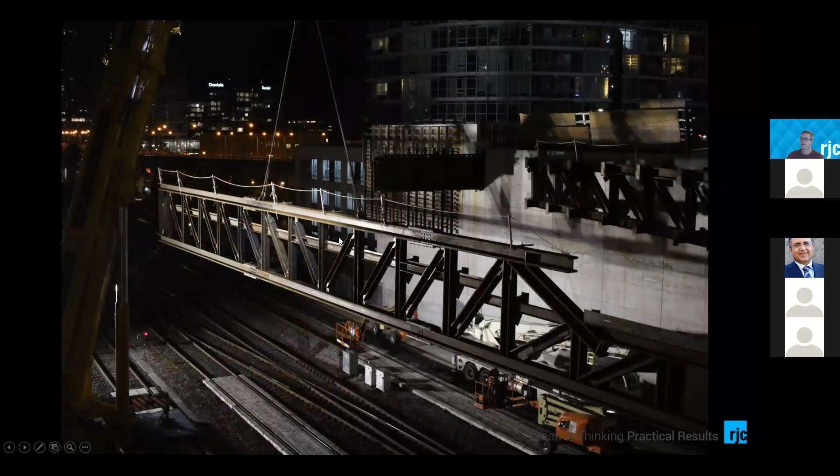All these lifts were done at night by EllisDon in conjunction with the Metrolinx team, because every single track needed to be closed to complete this operation. Quite a feat of engineering, quite a feat of temporary works and logistics.

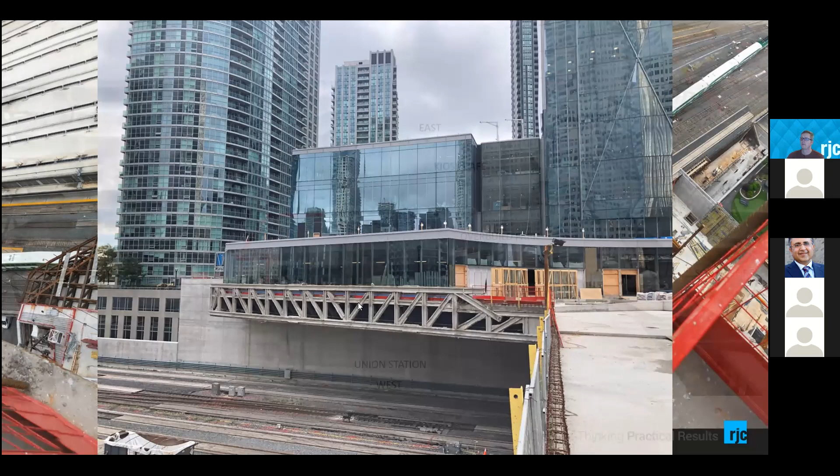There you can see it from above, and this is what it looks like today. It's a little more advanced now, but what's sitting on top of it is a pavilion, with a high-end restaurant planned with views of the city. So from here, we have our gaze from the park into the phase 2 structure, and I'll pass it back over to Tibor to talk about that element of the project.

Thanks, Andrew. Can you hear me? Yes, we can hear you. Sorry for losing you guys, not sure what happened.

So this is 141 Bay, the North Tower. This is track 1, where my cursor is. The columns have to come back to the core, and the whole tower wants to tip south. So we took out the left columns as well, and we have this beautiful triangle, as I showed you in that picture at the very beginning. This is the trick of this tower. Very, very complicated.

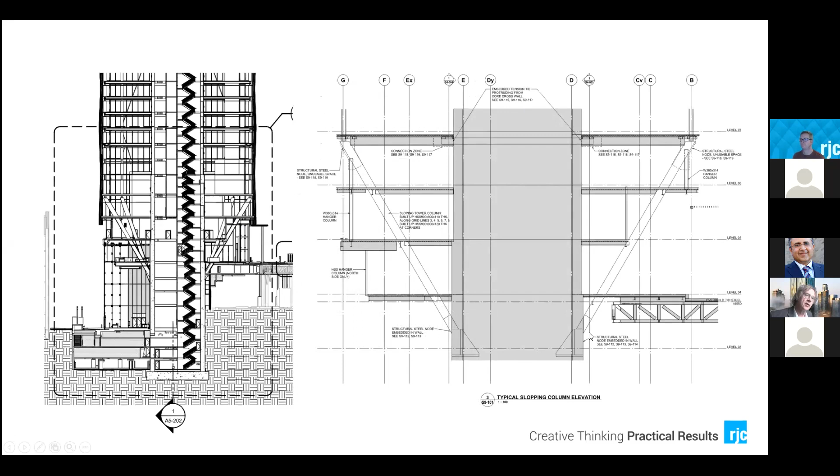In reality, this is how it looks like. We have permit drawings, we received the permits. We have special nodes, so for these insane loads sit on concrete, and we don't have bearing problems.

In 3D, this is how it looks like, because we have the core of 141 Bay. We have the columns coming down vertically, and they all tilt back to the core. The south face of the core is also an elevator core wall, but a crash wall as well. So from the total vertical columns in 141 Bay, only the 2 very west ones and the 2 very east ones go down. Everything else comes back to the core.

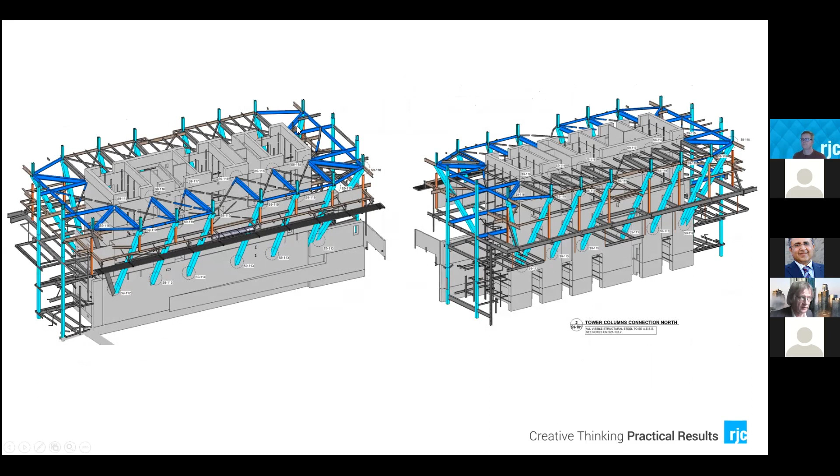This is how it looks like, with some detail on how the design was done and how the columns sit and how they are manufactured. Quite a complex process and discussions with the steel supplier.

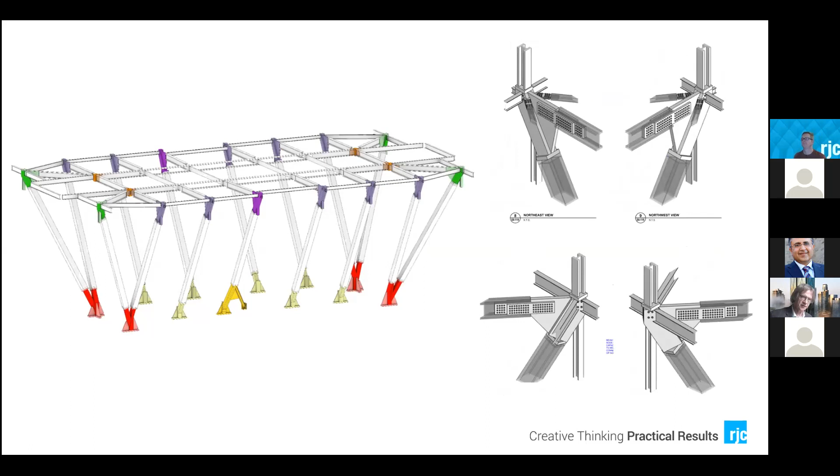We don't want to go into these tension details, but some of these tension ties going through the core are in the range of 15,000 to 20,000 kilonewtons. Imagine how much strain and elongation you have in that floor, what happens to the finishes, etc. There's a lot to consider here, not just how many bolts we need, or whether those bolts fit.

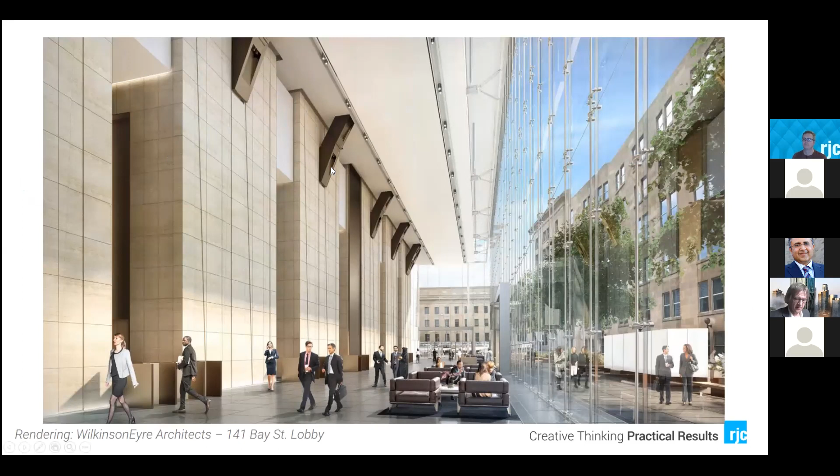So this is the bus terminal, which is demolished by now. This is the south face of one front west building. This is where the new core comes down, and exactly this is what you will see. This is the core, this is the columns kicking in, and one level higher, the columns are going more to the north and south.

This is it, a picture of Beno and myself. Thank you, and I'm sorry I missed a few minutes there, not sure what happened. Hope you enjoyed it. Thanks very much.

Okay, thank you very much, Tibor and Andrew, for a very, very interesting presentation. Very impressive project. I'm sure everybody enjoyed the presentation.

We can open the floor for some questions. If you have questions, put it on the chat. But till we see that, I want to ask you in general if you can comment on something. This is a group of graduate students, masters, MEng, MSc, and PhD. So Tibor, what advice would you give for the students so they can eventually become capable of managing projects of this size and designing projects of this complexity? Thank you, I will try to be short.

There's a couple of things that are really crucial. Number one is communication. I really think that you have to know how to talk. And I have an accent, I'm an immigrant, but it's not about speaking correctly; of course, nicely would be best, but you have to know when to speak, what to say, how much to say.